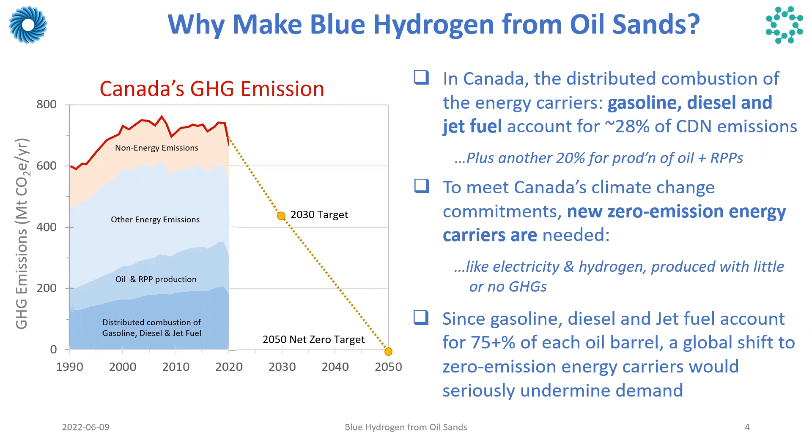So it is reasonable to say that under a net zero emission scenario, around 70% of the oil demand will disappear. To get a clearer picture, here I brought the results of a study by the International Energy Agency, IEA. This study shows that the current demand for oil, as there's a balance between production and demand, around 100 million barrels per day these days, is going to drop to around 30 million barrels per day under a net zero emission scenario.

On the other hand, the price for oil, which is around $100 per barrel these days, is going to drop to around $25 per barrel, equivalent to around $4 per gigajoule, approximately the same as natural gas prices these days. Of course, we need to take into account that this is Brent crude price, so we need to bring in the difference between Brent crude and West Texas Intermediate, and also the difference between West Texas Intermediate and Western Canadian Select.

So you now would admit that under a net zero emission scenario, producing oil from the oil sands resources here in Alberta might become economically infeasible.

We also need to add this point: most of the jurisdictions that are Alberta's trade partners, such as the US or even Canadian provinces like British Columbia, have already approved the use of zero emission energy carriers in the near future. So under a net zero emission scenario, there's a possibility that Alberta cannot export those traditional fossil fuels to other jurisdictions, which worsens the situation.

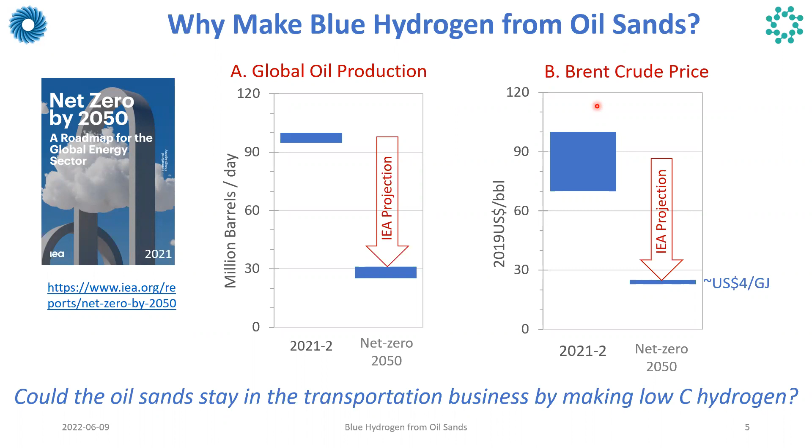Since in this study we considered an extension for the hydrogen production unit to an existing bitumen production facility, we only consider two widely used, already commercialized and proven methods for producing bitumen from the oil sands resources.

The first one is mining methods. This method is usually used for oil sand deposits that are near the surface, let's say 50 to 75 meters under the ground.

In this method, as you can see here on the slide, first the oil sand is excavated through a shovel and truck operation. Thereafter, the excavated oil sand is hauled using big haulers to the mining facility site, where it undergoes a hot water treatment process, and the bitumen is separated from the sands. The clean bitumen is then sent to an upgrader and converted into synthetic crude oil, which is then sent to refineries for producing end-use fuels.

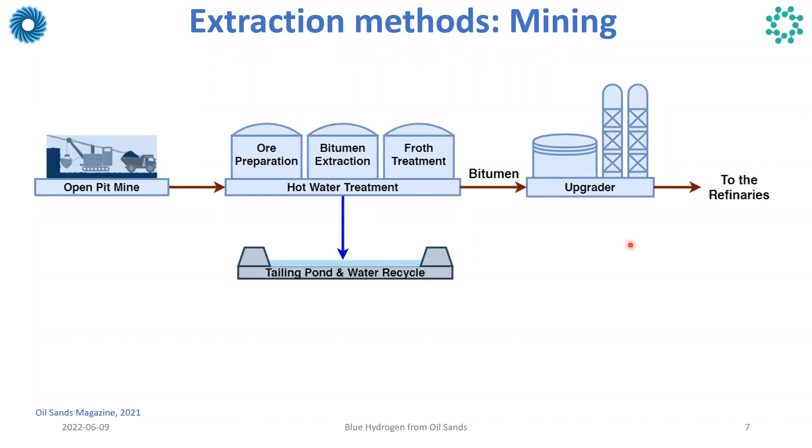As I mentioned earlier, we're going to consider an existing bitumen production facility with the mining method. We take the bitumen from here, and instead of sending it to an upgrader followed by refineries for producing end-use fuels, we put it into a hydrogen production unit. I'll talk about the details of the process later, which produces two separate pure streams: hydrogen, which can be used locally or exported, and carbon dioxide, which is permanently sequestered in geological storage.

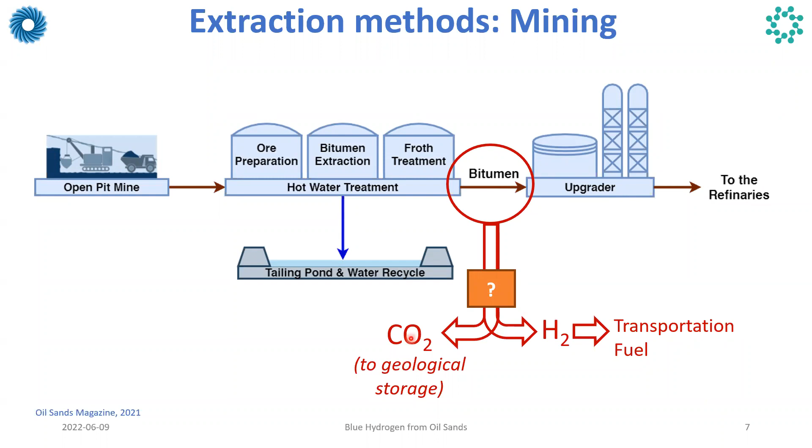The second method is steam-assisted gravity drainage, or SAGD for short. This method is usually used for oil sand deposits that are deeper under the ground, say 150 to around 450 meters. In this method, initially, two horizontal wells are drilled in the oil sand deposits, located about 5 meters apart from each other.

Then steam, generated through a steam generation unit, is injected through the injector well, or the top well, which hits the bitumen, liquefies it, and then the bitumen gravity flows toward the production well.

The water and bitumen are then sent or pumped to an oil-water separation unit where the bitumen is separated from the water, and then it is mixed with the diluent to produce the dilbit stream, which is sent to the refineries for producing traditional fossil fuels.

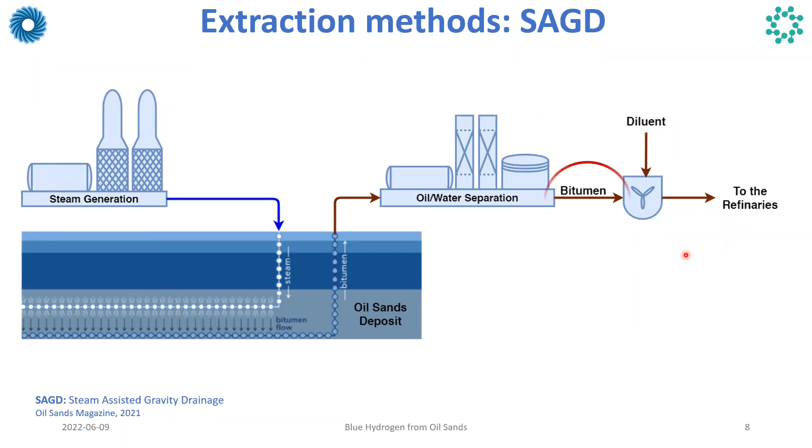Like the previous case, here we take the clean bitumen and put it into a hydrogen production process, which I'll talk about later, to produce hydrogen and CO2.

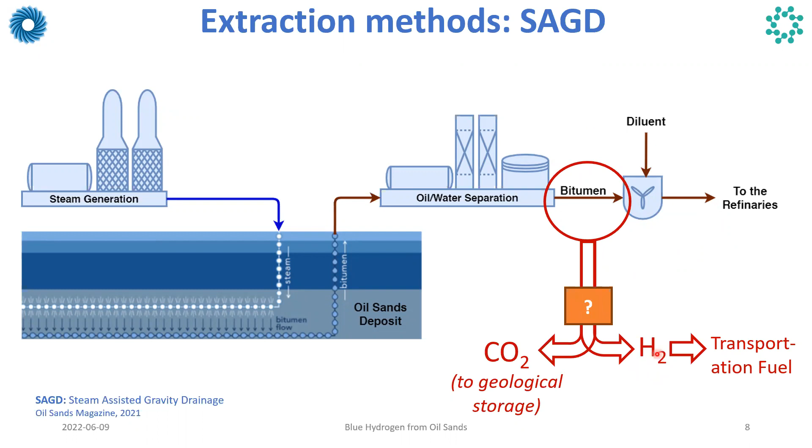Considering these two methods, mining and SAGD, we are proposing 5 options for converting bitumen to hydrogen. The basis for all these options is the brownfield expansion of an existing bitumen production facility with a capacity of 10,000 barrels per day. Let's go take a look at the details of the options.

The first option is called Mine. As mentioned, the basis is 10,000 barrels per day. The oil sands containing 10,000 barrels per day of bitumen is sent to a mining facility, which we consider a business-as-usual case, using diesel and grid electricity to satisfy the energy demand. The clean bitumen produced is put into a gasifier, followed by a water gas shift reactor and several purification steps, including pressure swing adsorption, to produce hydrogen and CO2 streams. For the hydrogen production unit, we assume carbon capture efficiency of 95%.

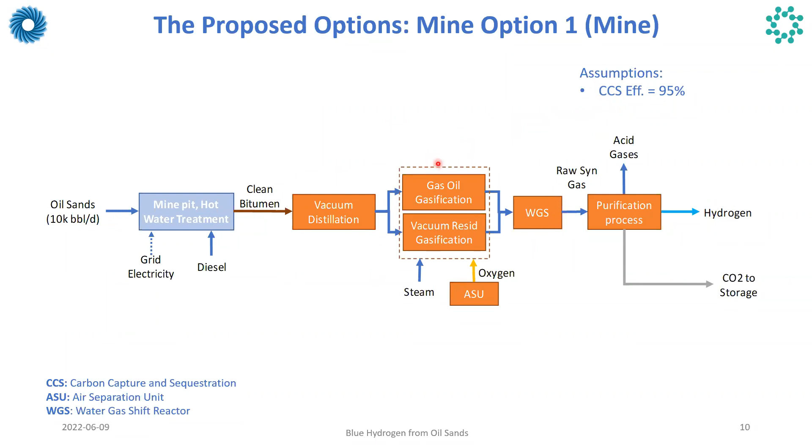Option number 2, which we call Mine H2 or Mine Hydrogen: here we capture emissions from the hydrogen production unit to reduce emissions further. For this purpose, we take some portion of the produced hydrogen and put it into the mining facility to satisfy the energy demand. As with option 1, the clean bitumen is produced, put into a gasifier, followed by a water gas shift reactor, and then several purification steps to produce hydrogen and CO2 for storage. The carbon capture efficiency considered for this option, same as option 1, is 95%.

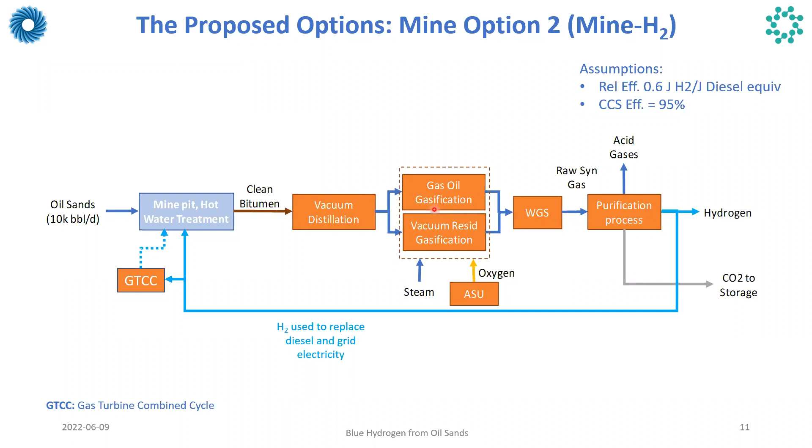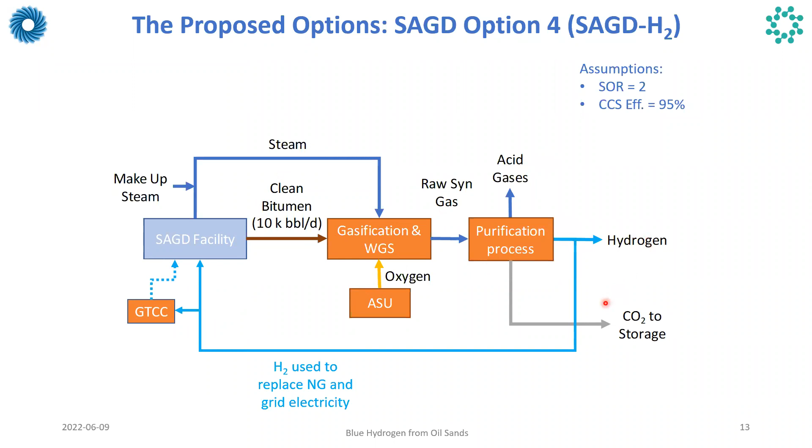Option number 4 is SAGD Hydrogen. Here we also reduce emissions from the bitumen production part. Same as Mine H2, we use some portion of the produced hydrogen to satisfy the energy demand for the SAGD facility, producing bitumen, then putting it into a gasifier, followed by a water gas shift reactor and purification process to produce hydrogen and CO2. Same assumptions apply: carbon capture efficiency for the hydrogen production unit is 95%, and the steam to oil ratio for the SAGD facility is 2.

Finally, option number 5 is SAGD-Oxy. Here, to reduce emissions from the SAGD facility, instead of using produced hydrogen, we produce additional oxygen. In the SAGD business-as-usual case, we burn natural gas with air to generate steam; this time we burn natural gas with oxygen, which increases the CO2 concentration in the flue gas of the steam generation unit. This gives us the opportunity for higher CO2 capture efficiency. For this option, we assume CO2 capture efficiency of 95% for the SAGD facility, in addition to the capture from the hydrogen production unit, with a steam to oil ratio of 2 again considered.

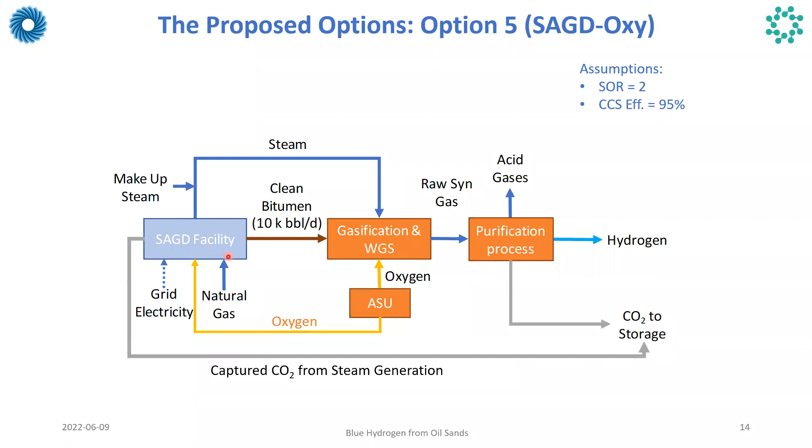So to summarize, we consider 5 options. The difference between these options is in the methods we deploy to produce bitumen, and the strategy we use for carbon management. In terms of bitumen production, we consider 2 options using mining methods and 3 options using SAGD.

In terms of the carbon management strategy, the standard feature we deploy for all options is to consider carbon capture with an efficiency of 95% for the hydrogen production unit. For the bitumen production part, for two options we consider using some portions of the produced hydrogen to mitigate the emissions from the bitumen production unit. And in the last case, for SAGD option number 5, we consider burning natural gas with oxygen in order to reduce the GHG emissions there.

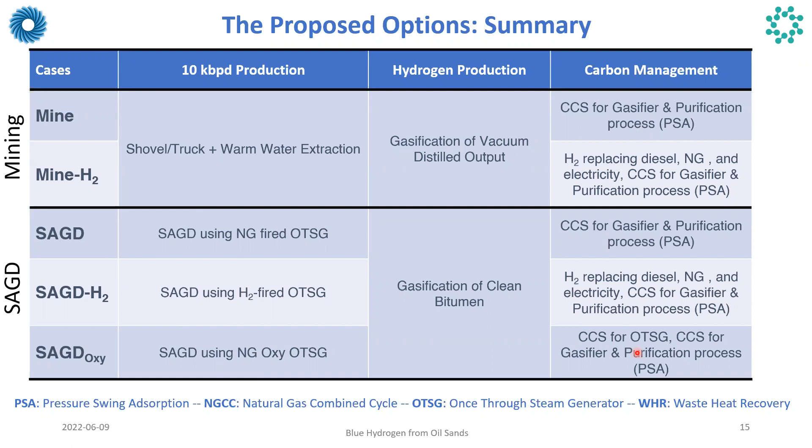Now that we understand the options in a bit more detail, let's talk about the material and energy flows we consider. In this slide I present the block flow diagrams for energy and material flows for two options, mine option number 1 and SAGD option number 3. I'm not going to go through the details of these diagrams, but if you're interested or have questions, feel free to drop them in Q&A or we can chat offline. One thing to note is that for the energy balances, we consider using maximum waste heat recovery to satisfy the demand for heat for the gasifier and water gas shift reactor. If anything remains, we use that waste heat to generate electricity.

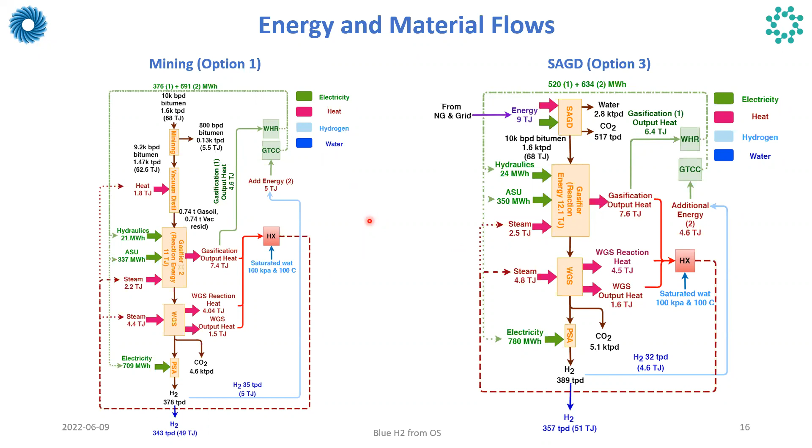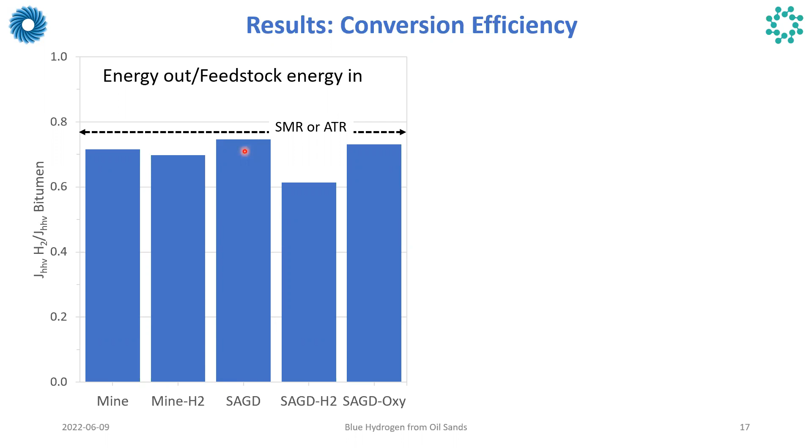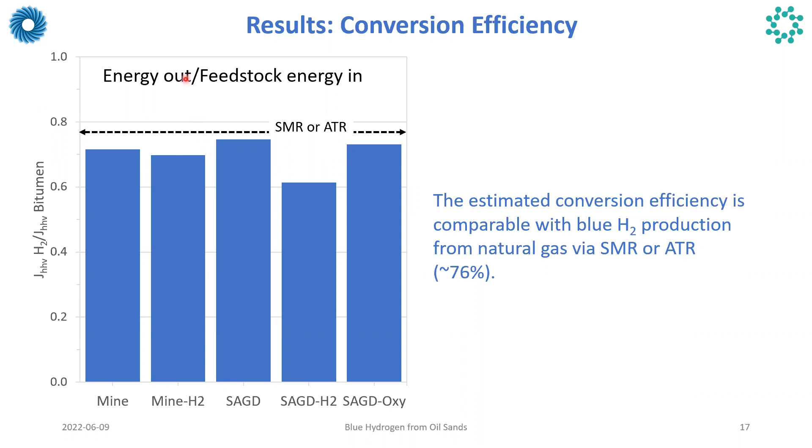Okay, let's move on to the results. First, let's talk about production. We define the conversion efficiency as the energy content of the hydrogen produced per energy content of the bitumen we put in. As you can see, for the 5 options the conversion efficiency varies from around 61% for SAGD-H2, the worst option, to about 75% for SAGD, the best option. To get a better understanding, I included the efficiency reported for the reference case, which I call hydrogen production from natural gas. Considering the reference case, we can see that for the top 3 options, SAGD, SAGD-Oxy, and mine, the estimated conversion efficiency is approximately comparable to the reference case.

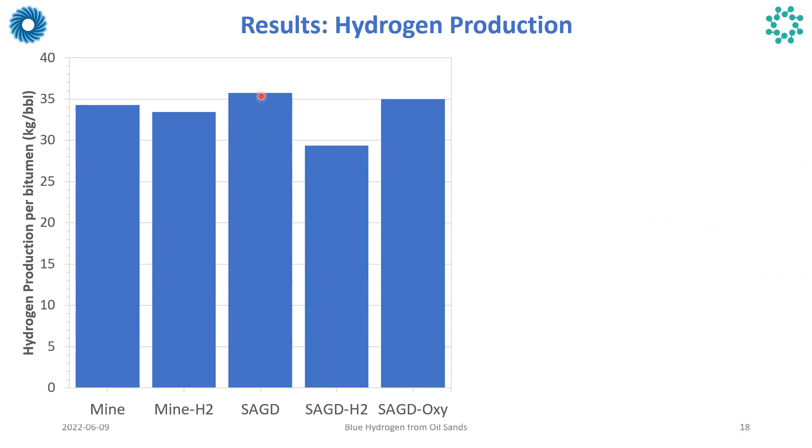In terms of production potential, the hydrogen production potential varies across the 5 options, from around 29 kilograms of hydrogen per barrel of bitumen to about 35-36 kilograms of hydrogen per barrel of bitumen for the base case, which is SAGD. Again, to get a better understanding, remember these numbers are based on 10,000 barrels per day of bitumen, so let's assume we have a typical SAGD facility with a capacity of 33,000 barrels per day.

If we convert this facility to produce hydrogen, from an oil producer facility to a hydrogen producer facility, according to our estimates, this facility is able to produce around 1,200 tons of hydrogen per day, or to be precise, 1,180 tons per day, which is equivalent to about 20% of current hydrogen production in Alberta. Of course, we also need to account for the fact that with this hydrogen production, about 6 megatons of CO2 per year would need to be sequestered.

So the takeaway message here is that under national strategies and different reports, in the near future we may need a huge amount of hydrogen. Our production analysis shows oil sand resources can be considered a good resource for supporting that demand, because of the abundant resources we have in Alberta.

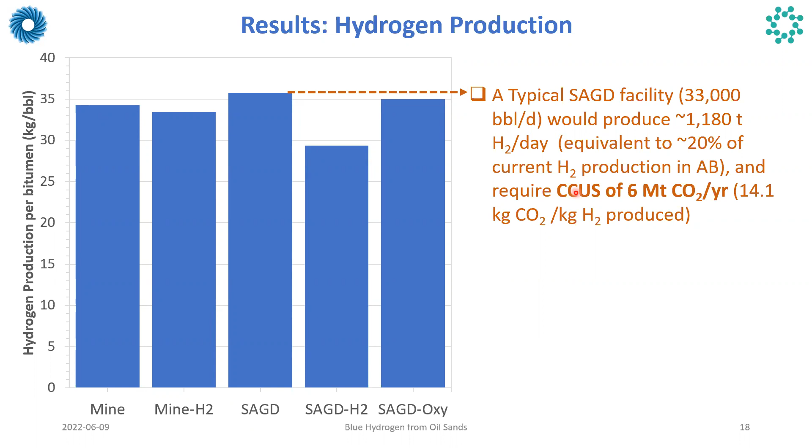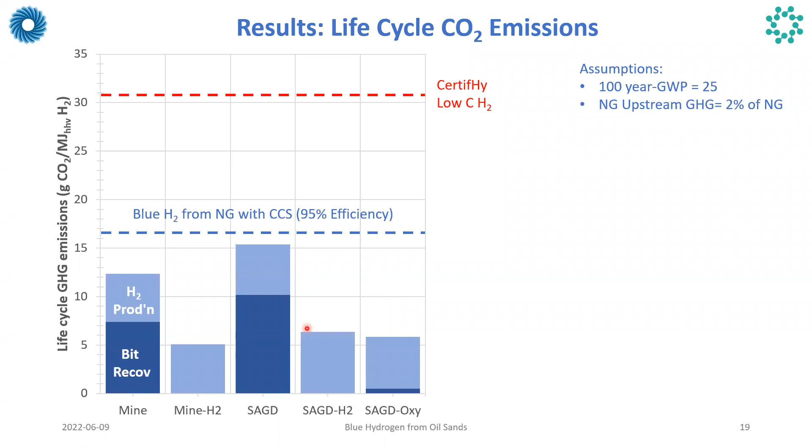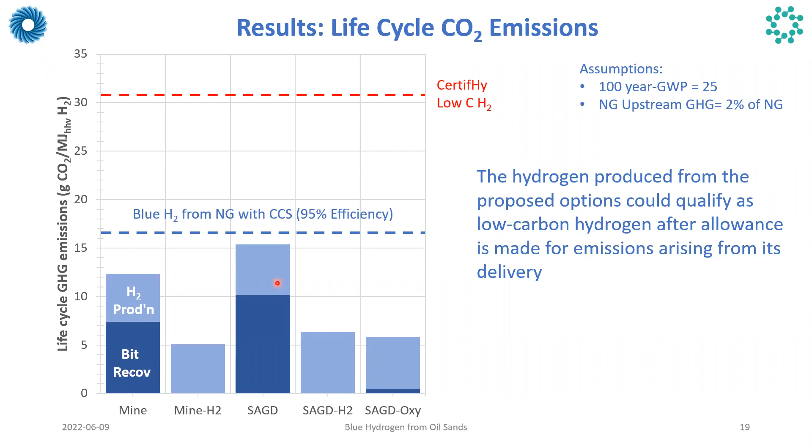The takeaway message here is that the hydrogen produced from the oil sands has the potential to be qualified as a low carbon hydrogen under a net zero emission scenario. Of course, one thing that needs to be taken into account is if we want to produce the hydrogen here in Alberta and export it to other jurisdictions, let's say Europe, the delivery emissions should be considered. This is not considered in our calculation.

Okay, let's now talk about the economic analysis that we did. Because of the scarcity of the data, especially in the public domain, we thought that instead of doing the economic analysis for all 5 options, let's first identify the best option, and then we do the economic analysis for the best option. For this purpose, we use Kepner and Tregoe, or KT analysis.

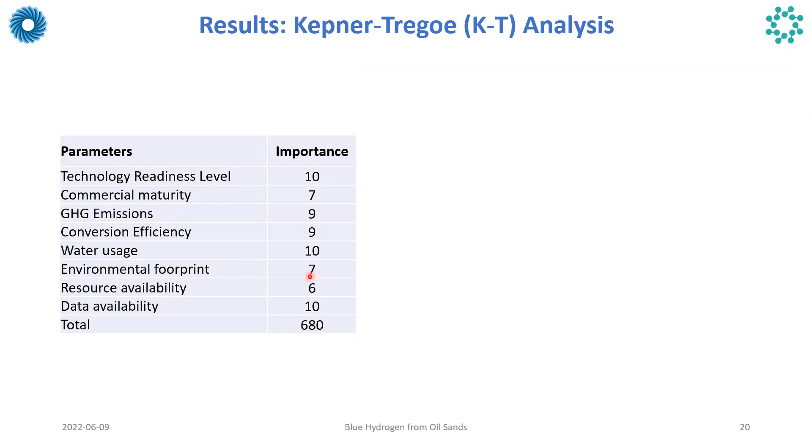Based on our in-house expertise, we defined these 8 benchmarks: technology readiness level, commercial maturity, GHG emissions, data availability, and so on. Thereafter we assign an importance factor to each of these benchmarks, and then a weight factor for each option. We do the multiplication and summation and estimate a score for each option. This is the normalized one, which varies from 0% to 100%.

So you can see here that the best option, according to KT analysis, is SAGD. So we are doing the technical and economic analysis for the SAGD option.

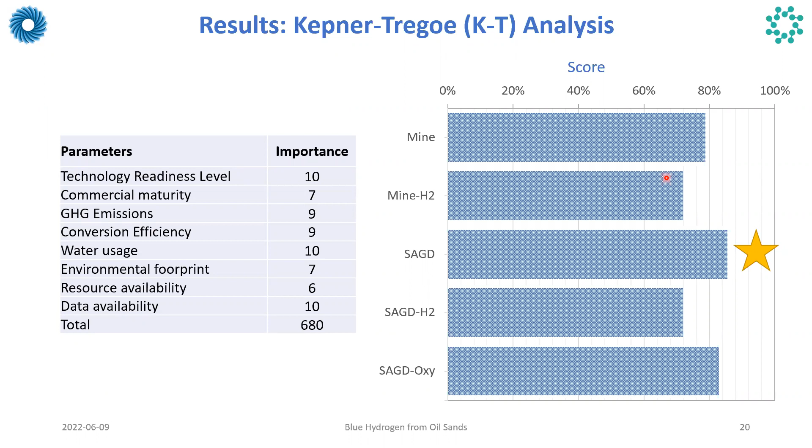Here are the list of assumptions we made. First and most important, this is a preliminary economic analysis, and because of the uncertainty of the publicly available data, instead of just putting a number there, we define a range. For this purpose, we define 2 scenarios, optimistic and conservative, and then we do the economic analysis for a brownfield expansion of a SAGD production facility.

With 10,000 barrels per day. The blue hydrogen production output is around 357 tons per day, with the CO2 for sequestration of around 5 kilotons per day. The other assumptions are as follows.

For the capital costs for the hydrogen production unit, we consider using the numbers from one of the recent NREL studies in 2022. And for the SAGD capital cost, we consider the numbers provided by the Alberta government for 2 SAGD facilities, expansion projects for Christina Lake and also for Foster Creek project.

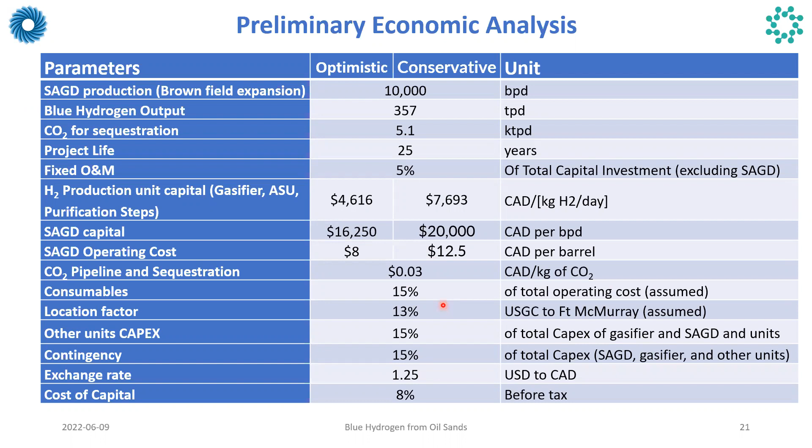In terms of operating costs, we consider the lower range operating costs for Christina Lake and the upper range of operating costs for the Foster Creek facility. The other assumptions are here. Again, if you have any questions, feel free to drop your question in the QA session, and we can chat offline about that. So let's go to the results.

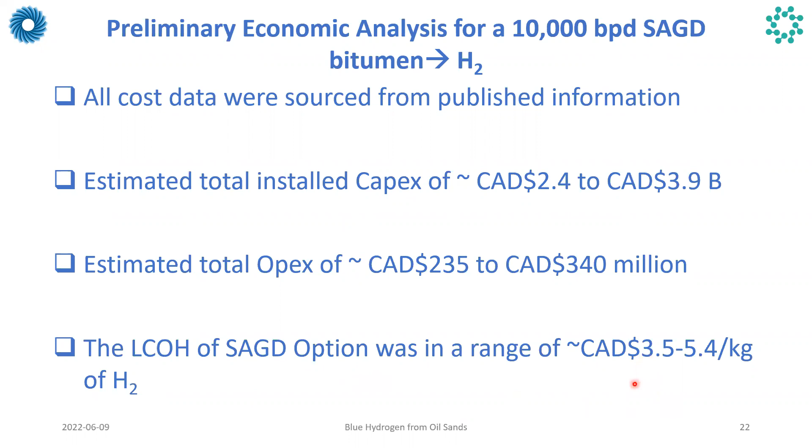Based on the economic analysis that we did, we found out that the total installed capex of the whole process is about 2.4 to 3.9 billion Canadian dollars, with total OPEX of 235 million to 340 million dollars. And finally, the levelized cost of hydrogen produced from the oil sand using SAGD as the bitumen production method is in the range of 3.5 to 5.4 dollars per kilogram of hydrogen.

In order to get a better understanding in terms of the cost breakdown, you can see the bar chart here, this is for the optimistic scenario. In terms of the share of capex and opex, they're approximately the same, with capex of 49% and opex of 51% for the optimistic scenario.

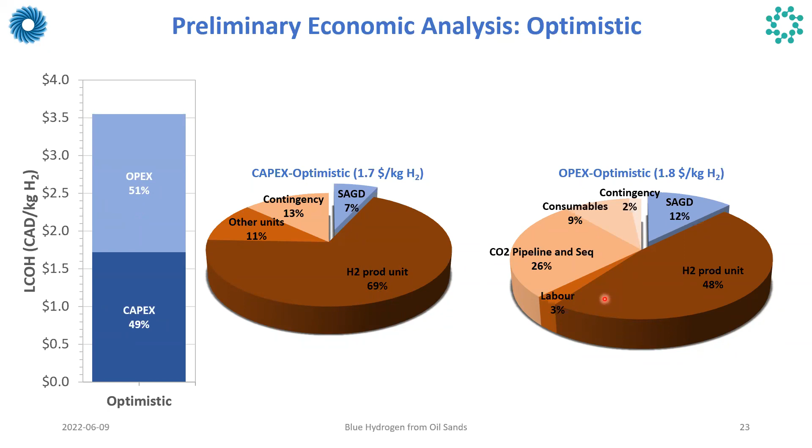Thereafter, in terms of the cost breakdown within the capex and within the opex, you can see the hydrogen production unit has the highest share, with 69% for capex and 48% for opex. For the conservative scenario, we see the same results in terms of the capex and opex share, approximately the same amount, with capex at 52% and opex at 48%.

And in terms of the cost breakdown within the CapEx and OpEx, again, the hydrogen production unit, in the conservative scenario, has got the highest share.

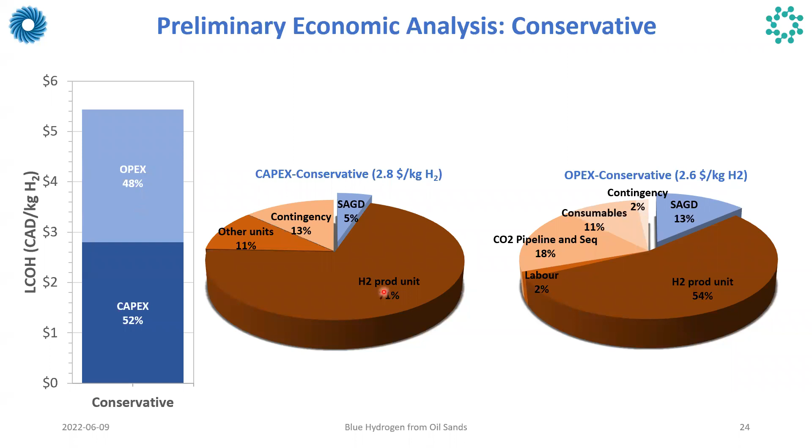With that, let's move on to the conclusions and next steps. We understood that under a net zero emission scenario, oil sand producers should produce alternatives, and since hydrogen is part of our strategies, one option they can consider is to produce hydrogen. This study tries to assess hydrogen production from oil sand from different perspectives, first of all from the production potential.

If you compare a typical SAGD facility to a hydrogen production facility, there is a potential to produce 1,000 to 1,200 tons of hydrogen per day, which is around 20% of the current hydrogen capacity in Alberta. Because of the abundance of oil sand resources, in terms of production potential we receive a green light for hydrogen production from the oil sand.

Definitely a viable option in terms of production potential to meet hydrogen demand. In terms of GHG intensity, because these are oil sands and highly emittive, the biggest concern is GHG emissions, that they're not a viable option. But according to our estimations, the GHG emission intensity was estimated to be about 5 to 15 kilograms CO2 per gigajoule of hydrogen, which is lower than the threshold defined by Hydrogen Europe and also lower than emissions from blue hydrogen from natural gas. This means hydrogen produced from oil sand can be considered low carbon hydrogen. So again, we receive a green light in terms of the environmental assessment, which shows that hydrogen production from oil sands is feasible and viable.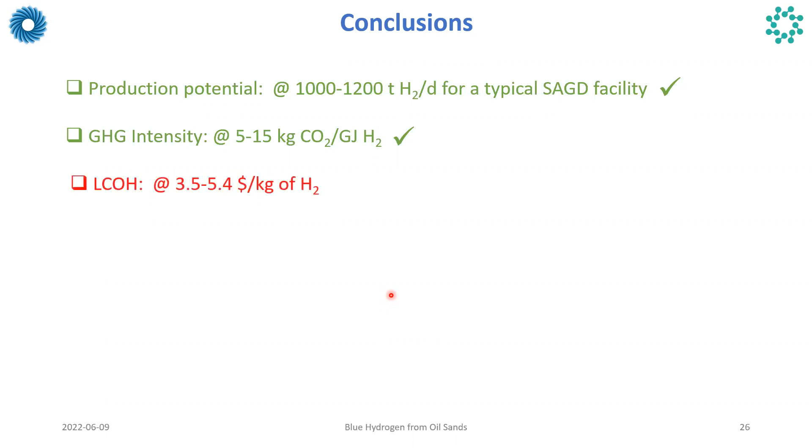In terms of economic analysis, the levelized cost of hydrogen was estimated to be around $3.5 to $5.4 per kilogram, which is a little high and might be too expensive. One main conclusion is that unless the CapEx and OpEx of the technologies for bitumen gasification to hydrogen are significantly reduced, the market for blue hydrogen production from oil sands will be limited. Of course there's a learning curve, and in the next couple of decades there's a possibility the CapEx and OpEx for bitumen gasification could reduce significantly, making hydrogen production from oil sands viable from an economic viewpoint.